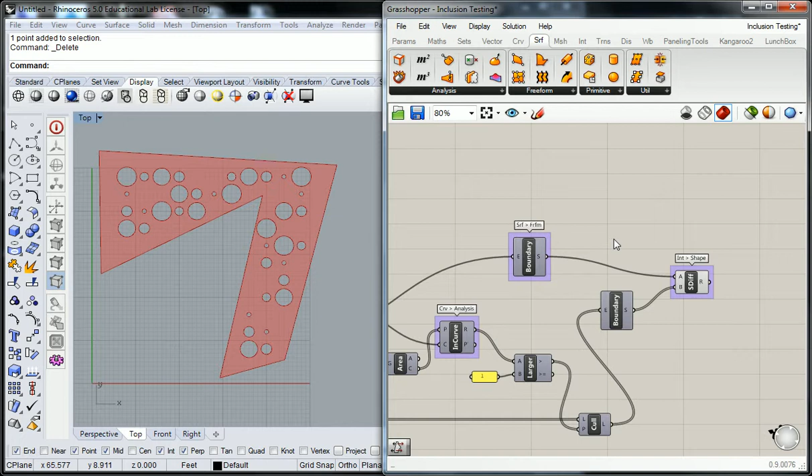So for this one, I want to show you just kind of the power of this when it comes to patterning and stuff. So you don't have to follow along. The video will be there for you. It's really the same thing we did earlier in the class. I just want you to see it and experience how easy it is. So please stop what you're doing, all of you, and just watch.

Okay, so if I take this pattern and I want to move it, now all I have to do is take the curve that I referenced and slide it to a new position, and it redoes the pattern. I can slide it anywhere that I still have the pattern. Up there, it's beyond the extent of my pattern, so I need to increase my pattern if I wanted to redo it. But it's going to test and retest and exclude and include wherever that pattern actually exists, which is pretty powerful.

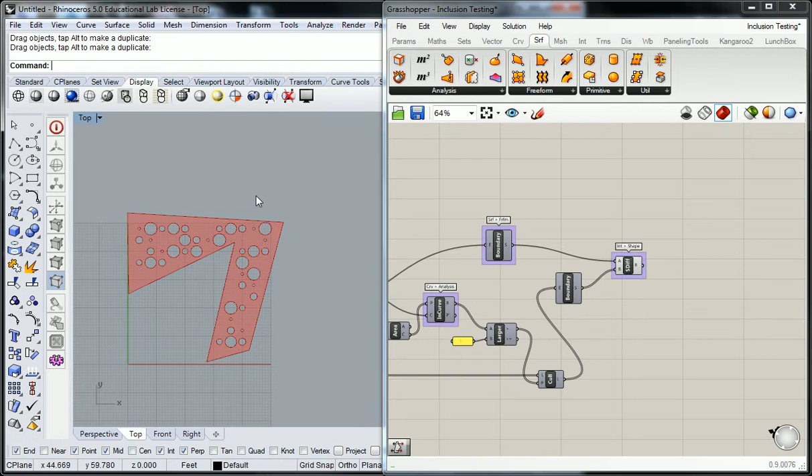I can go all the way back to the beginning, and I can change the Y direction and change the organization of the pattern. I can randomize what the values are. I can change my trues and falses to change the pattern that way. Any number of things that I want to do to change it are modifiable here.

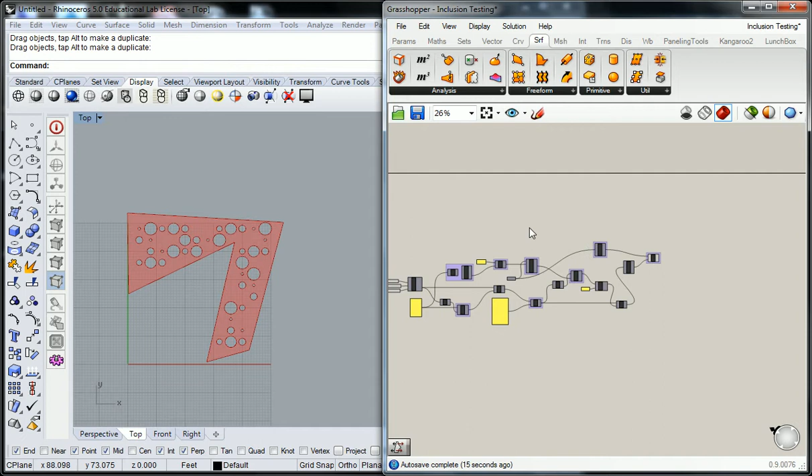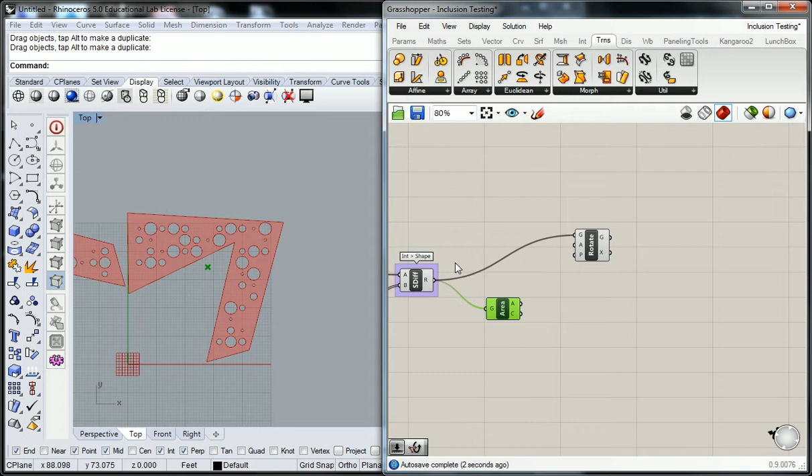But additionally, if I wanted to very simply take that surface, create a new one with a rotator, I'm just going to go under transform, Euclidean, sorry, not orient, rotate, and I'm going to rotate this geometry. Sorry, not there. It needs to happen back here, actually. I think that's the right one.

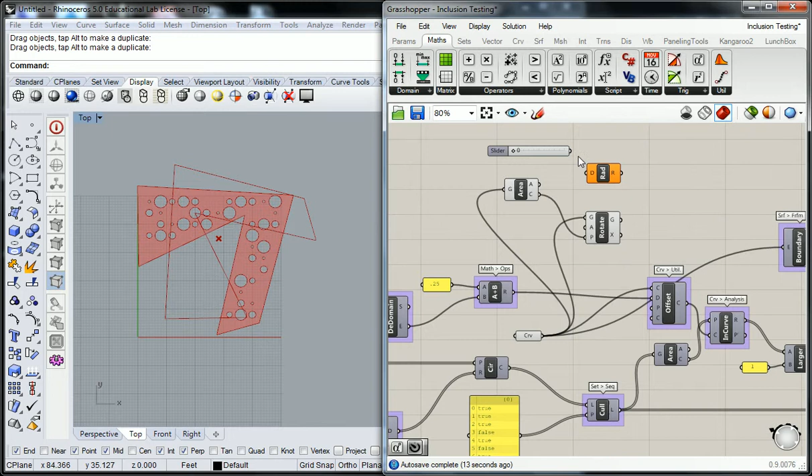So I'm going to go and rotate this geometry about its center point. An angle 0 less than 360. Wait, I need radians. Right, and so now you're just kind of watching how fast, once you know what you're doing, this really can come to fruition.

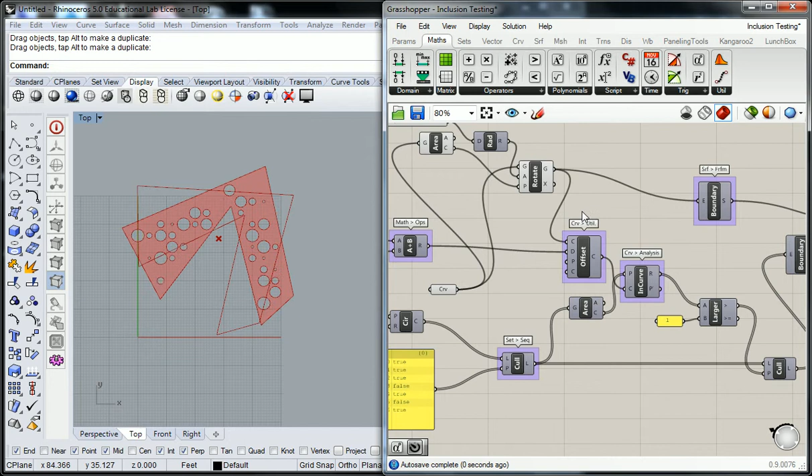So I've got my rotator, now I can change the orientation of that angle, so all I have to do is replace the connections. Okay, so if I take that new geometry and I replace the boundary here and the boundary there, now I can do the same thing rotating with the pattern, which is a very, very powerful thing. With the pattern? With the pattern, yeah. The pattern is responding to every angle that I change.

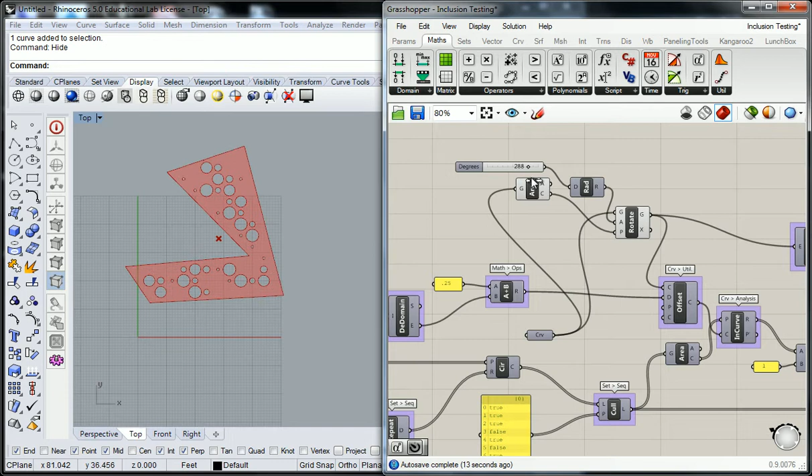How could you get just one pattern on there and then just rotate that? So if I got one pattern on there and I just want to rotate that, I take this whole package of information, put it at the end, and I just use this instead. So that's the geometry. This is the geometry I'm rotating. I turn all this off and that. And now I can rotate a completed geometry. Pretty cool, right?

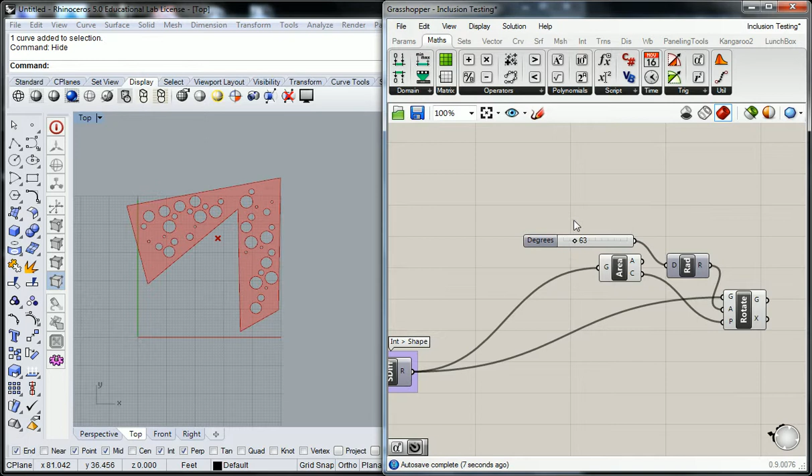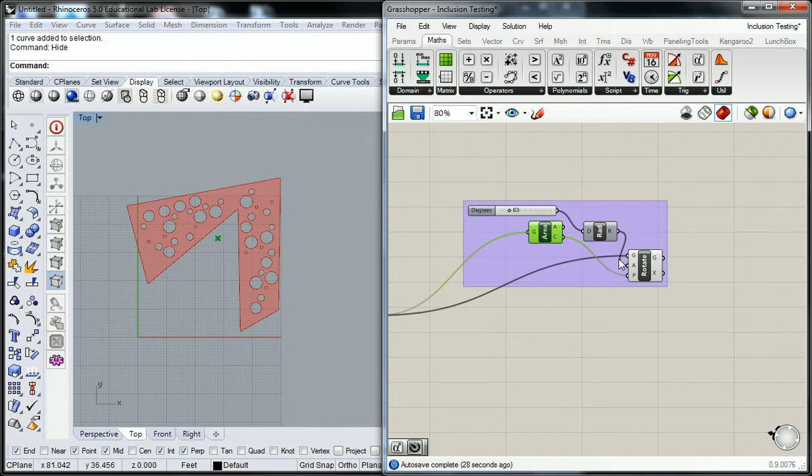So this is kind of what I mean. If you understand how to package information together, it becomes really, really efficient, right? Because I know that every time I need to do a rotate, I need radians, I need a 0 to 360, I need a center point. So I need to do that every time, a little package like this, every time I do a rotate. Okay, so it looks a little crazy. We could clean it up. I'm going to save this for you on the drive.

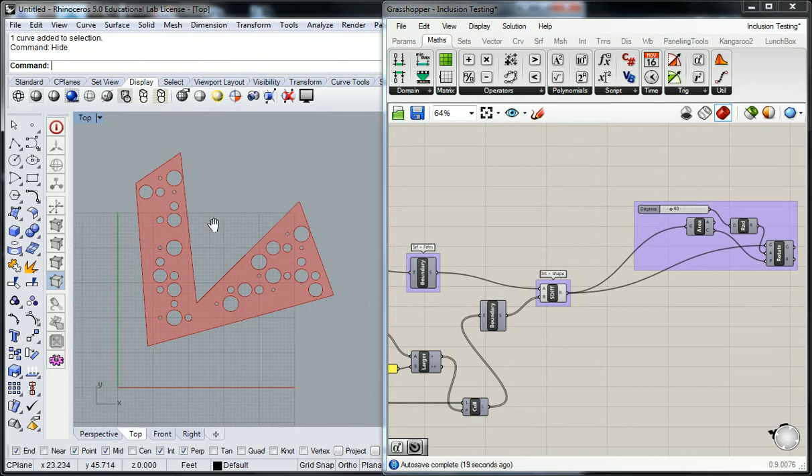And you had a question. What was the normals question again? If you could view which direction this... Ah, yes. I'll put that in the video here. So if you want to view the direction that the normal is heading, you're going to need to use a display. All right, let me just get rid of that. I don't need that. So if you go under display, they have this cool one that's called vector display right here.

And vector display has this little jagged edge on the back. Okay, so that tells you something. It tells you that it is the end of a feature. So it serves no other purpose than for you to give it information, for it to show you something, and it cannot create anything else beyond that. So what it asks for is the anchor point, and it also asks for a vector. So you need to find the normal of the surface, then give it the point and the vector normal, and it'll show you the direction.

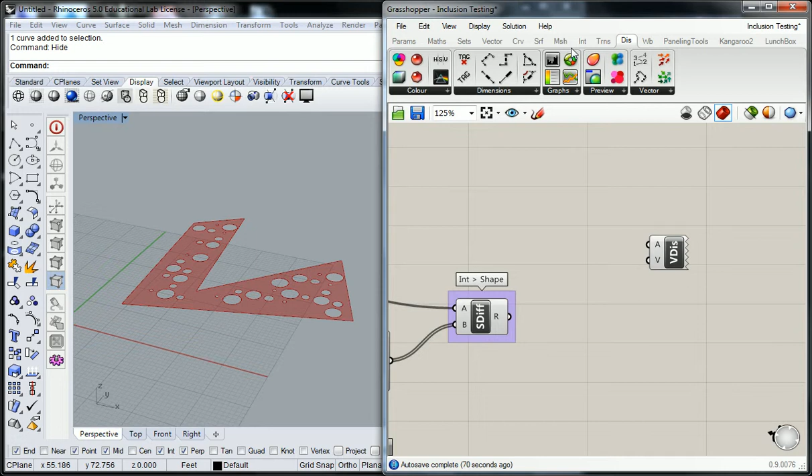And now we're going back again to information we're seeing for the third or fourth time now. We need to find the surface normal. So we go to surface analysis, evaluate surface, and surface closest point, and we do the same triangular configuration, right? We're going to need area, so we get the centroid. We plug the surface in here. We plug the center point in there. We connect UV, P to UV, connect the surface. Now we have our normal orientation.

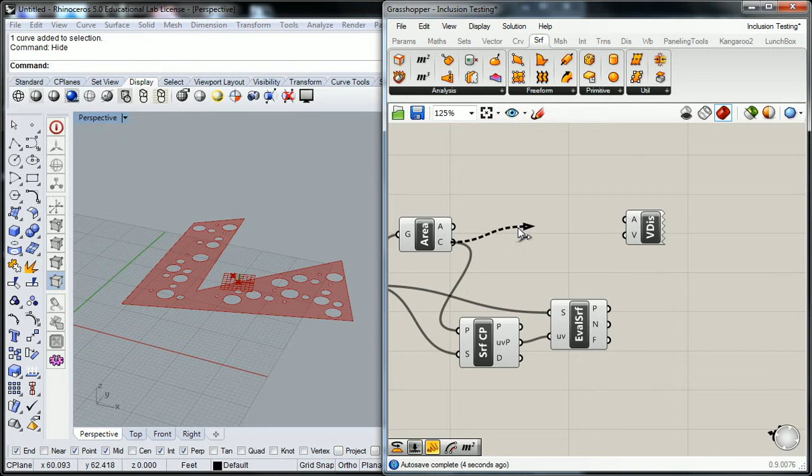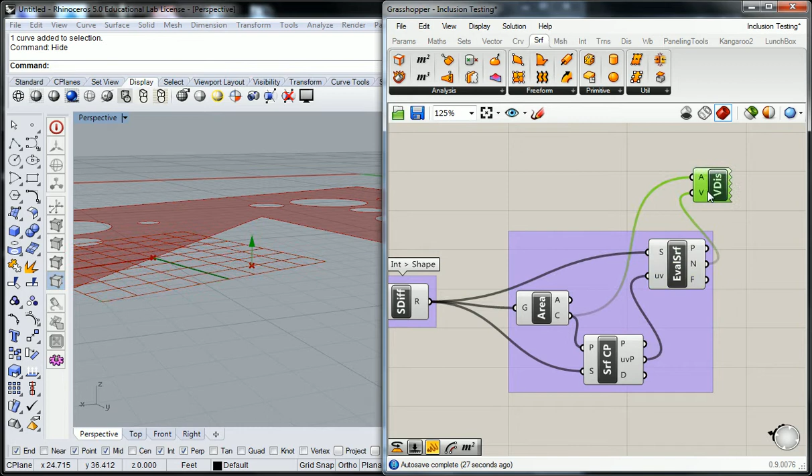So we use the centroid as your anchor point and the normal as your V, and there it is. That's telling you what direction your normal is heading. This is a package. It's an ugly one right now, but it's a package. Is that clear? Are there any questions about that?